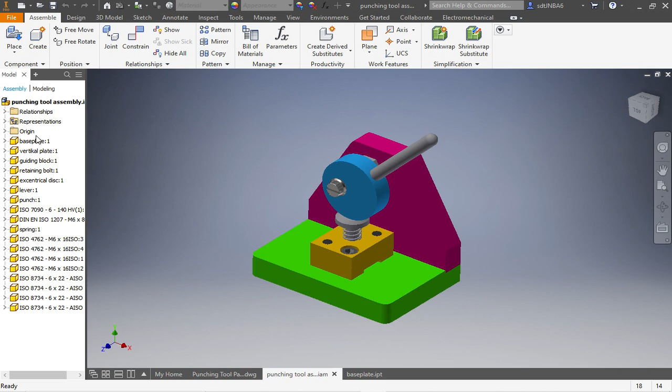Welcome back to our punching tool assembly. Right now I want to talk about the base plate, how the base plate is made. The base plate looks like this. What's important about this part is to use the sketch several times. Afterwards you can do the guiding block by yourself and the vertical plate, but I will discuss both parts as well. So let's get started with the base plate.

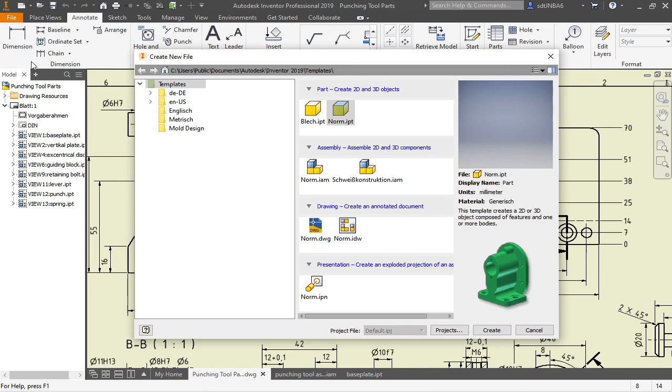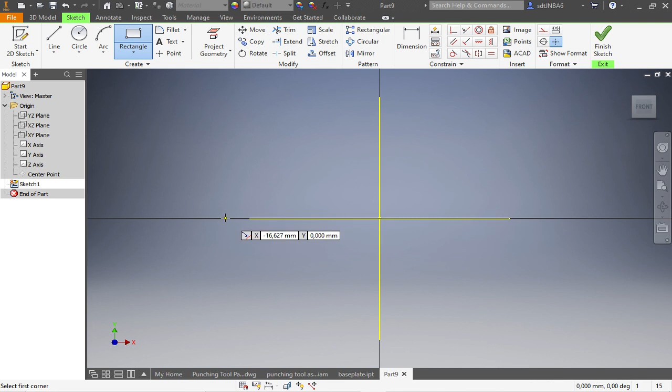We go on File, New, Standard Part, Create, start a sketch. On the XY plane, we project the horizontal and the vertical plane into our sketch to work with it. Make a rectangle, place it on the X line, make sure it snaps to the X-axis.

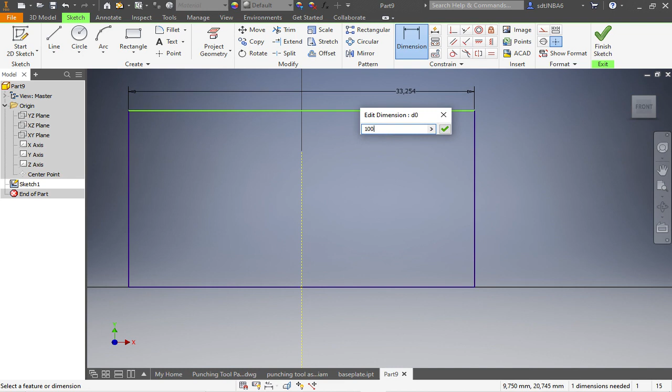I want to make the vertical line as a construction line, so we can go on symmetric and make the left side and the right side, click both, to the center symmetric. We add the dimension, it's 100.

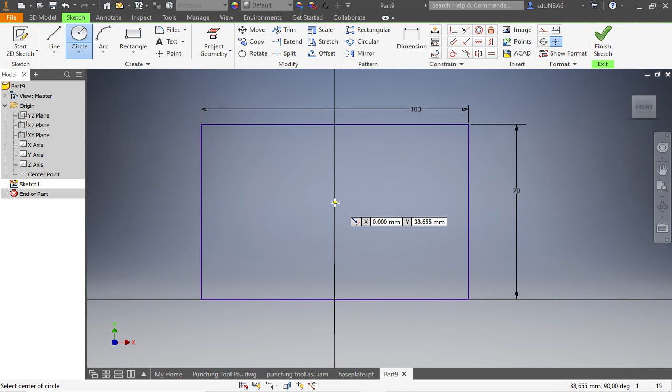Okay, and at first I want to talk about the most important thing. It's the hole in the center with an 8mm diameter where the punch goes through. This is the most important thing. I could make a point and later take the hole feature, but in this case I just take a circle with the right dimension. That's good enough. This hole has a distance of 38mm from the edge.

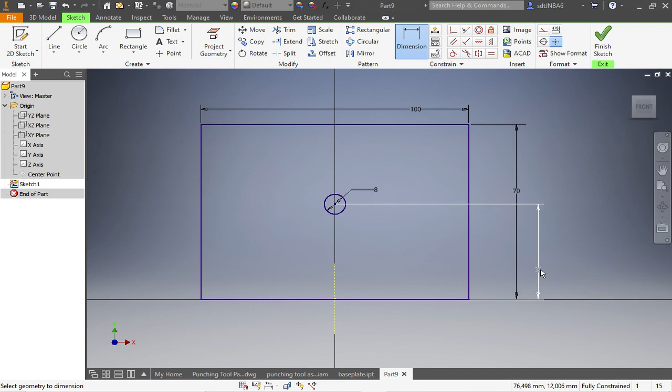And now all the holes that are around this hole, they are symmetric to this hole as well. So let's make 4 points that we later use. So we make them symmetric to the vertical line. Go on symmetric, point, point, point, point, and here. They are also vertical, so go on vertical, point, point, and now the points are all vertical,

but they're not symmetrical to this 8mm hole so far. Therefore, I draw another line, switch this line to construction, and now I can use the symmetry tool again. Point, point, this time this line as a center line. Now you can see all the points are moving symmetrically around the 8mm punching hole.

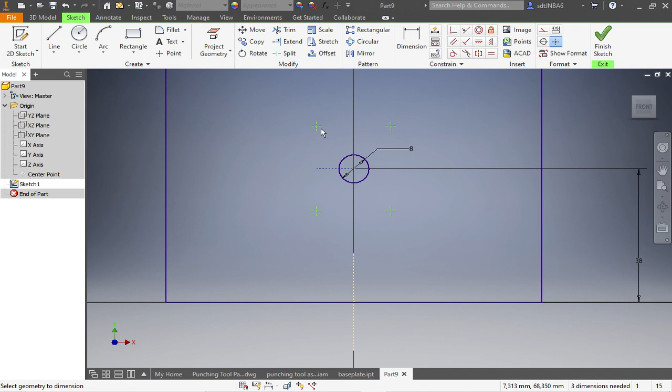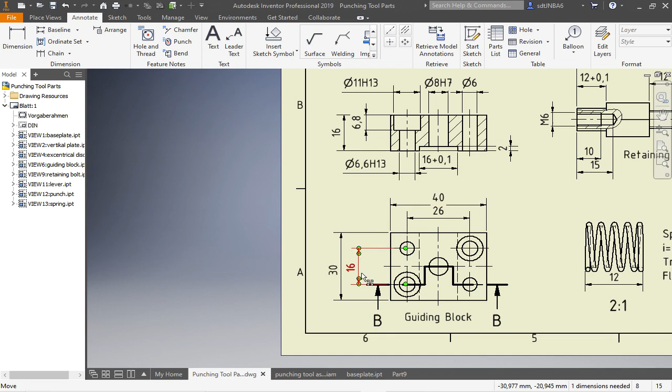So we bring in the distances. It's 16mm here, and this distance is a 26. Why don't I use the 25 and the 51? Because the part that is going to fit to those holes is the guiding block, and the distance of the holes is 26 here. So I rather use the 26 and the 16 instead of those numbers here.

So now we're going to create the points on the edge. Therefore, I personally like to have a line which I switch to a construction line. Then I can place the points, 4 points on this line, 1, 2, 3, 4, make them all symmetric to the vertical line, like so, this, give this one the dimension from the edge, it's 7mm,

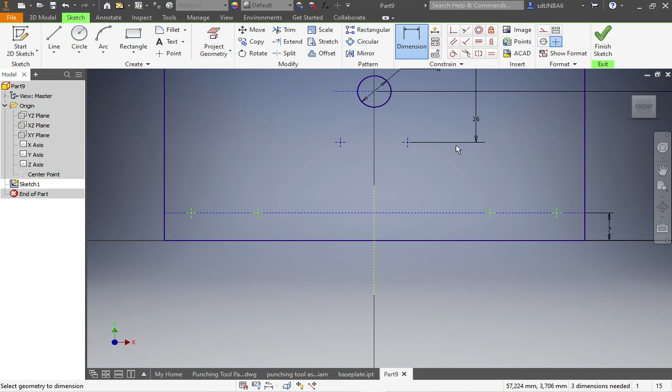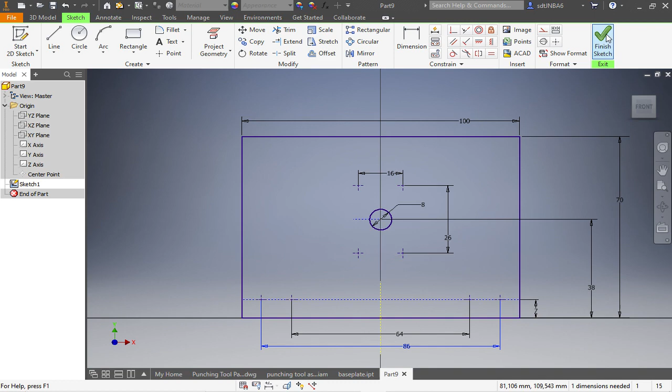insert the dimensions of the holes from each other, 64 and 86. And now we're done with the basic sketch. Finish the sketch. Now we have to extrude. Go on extrude, go on the surface, and I take the positive Z direction, entering a 14,

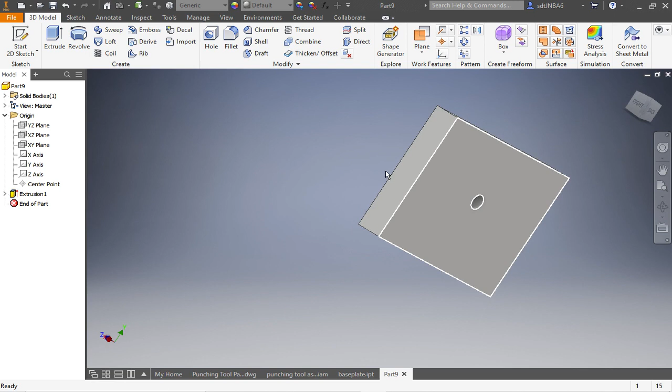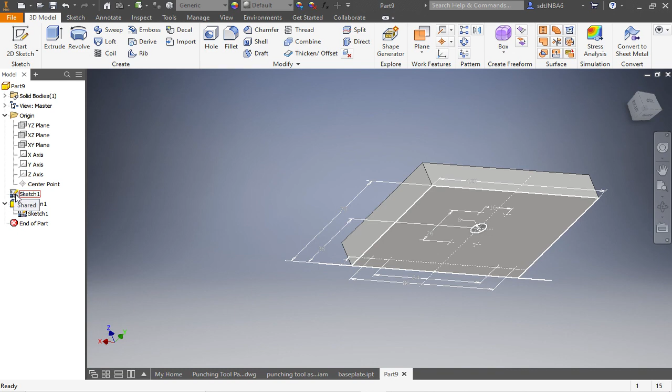and that's okay. And I consider this side here as the bottom and this as the top, as the sketch lies on this side. So to drill in the holes, I have to reuse the sketch I created. Therefore, open up the extrusion, go on the sketch, right click, and share sketch. Now you can see this little hand below the sketch, and the sketch is also shown here at the top of the extrusion. Now I can use the holes again.

So right now I want to make the holes. Go on holes. Normally if you start a sketch, the program chooses all the points you made in the sketch, but actually we don't want all the holes, we only want a few. So we're going to unselect the holes by drawing a box over all the points. And now we choose the points we need for the 6mm hole separately, like so.

Go here, simple hole, no seat, termination, through all. So it's important to flip the directions, like if you only see one or no hole, flip the direction, go in here for 6mm, and then we're done.

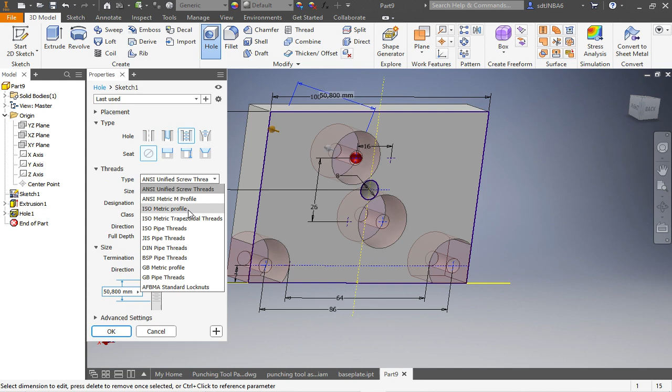Now we are going to make the threads. Go on hole. We uncheck the dots. Now those two will be a thread. We go here on tapped hole. Go on ISO metric profile. Choose M6. Termination through all. And now we have to make sure that we go full depth. And then we go here and here. That's it. Those are the two we need. And say OK.

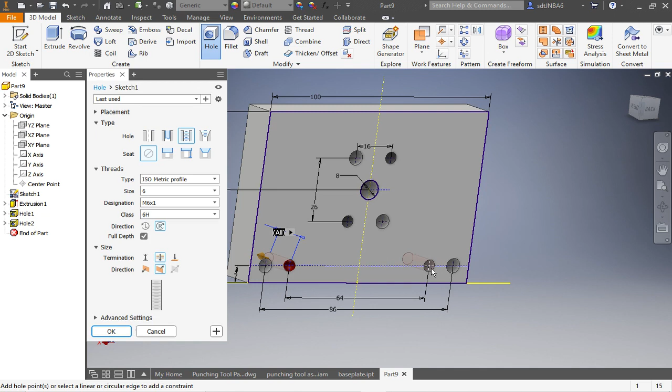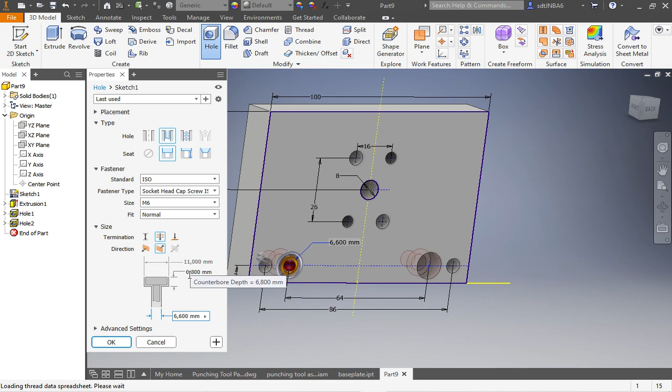Finally, we make those two holes. Go here. The last ones are already chosen. So go here on clearance hole, take the counter bore, go on ISO. We choose the right screw we will put in. So this time it's the 4762. Choose M6. And now we have the right dimensions for our counter bore. Say OK, and that's it.

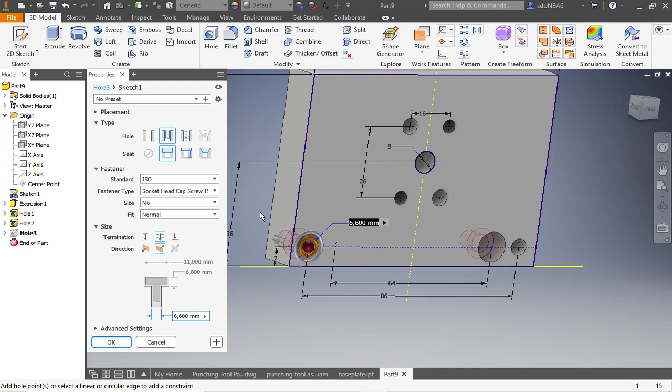So in case you have problems with the holes, I will show you an extra tip. Let's go back to edit the feature. Now if you want to unselect, I showed you before, you can make this box, or you can click the point separately, unchecking it by holding the shift and not pointing at the middle, but a little bit beside the cross. And then you can uncheck as well.

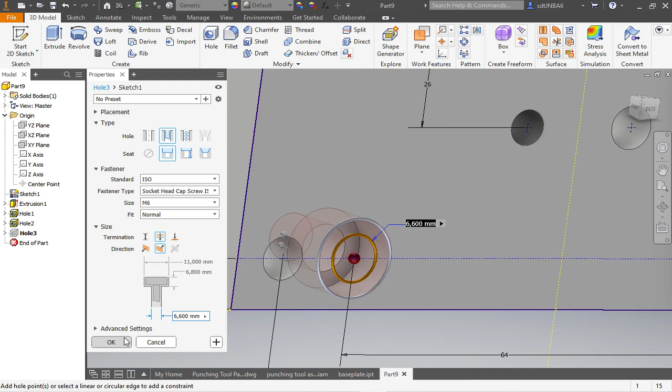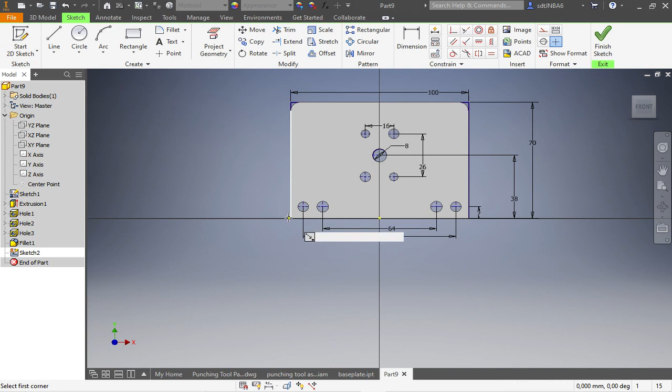We have to insert the fillet on the edges with a 5 radius, this and this one. And now we have to do the little cut on the upper surface. Go here, start sketch, make rectangle again. From the edge to the other edge with a width of 14mm. Now everything is purple, that looks great, nothing is green.

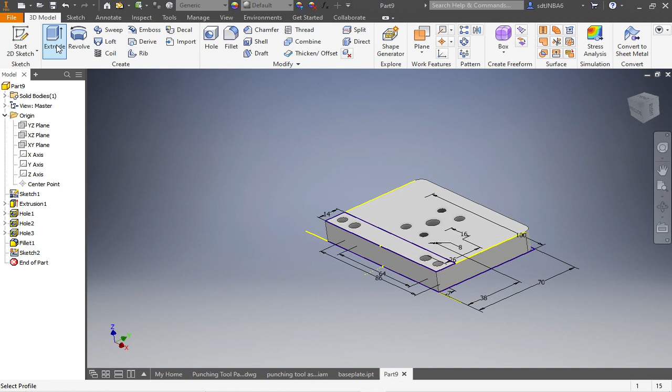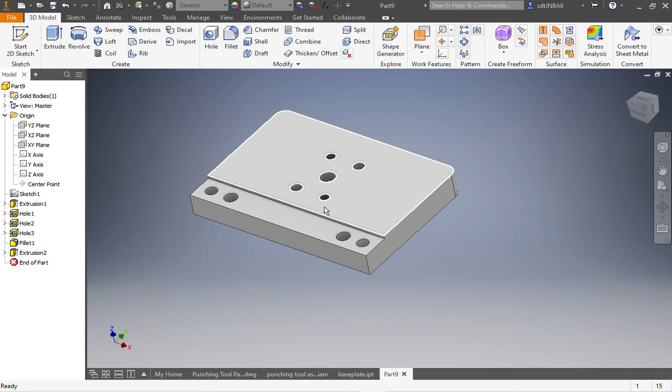We click Finish Sketch, go Extrude, and here on the cut, profile is selected, distance, we have a 2 mm cut. So the only thing we have left to do is uncheck the visibility of the sketch so everything looks fine. Now you can save this part as the base plate, and you can start with the guiding block, making this pattern the same way, and I will shortly show you how I build up the guiding block.

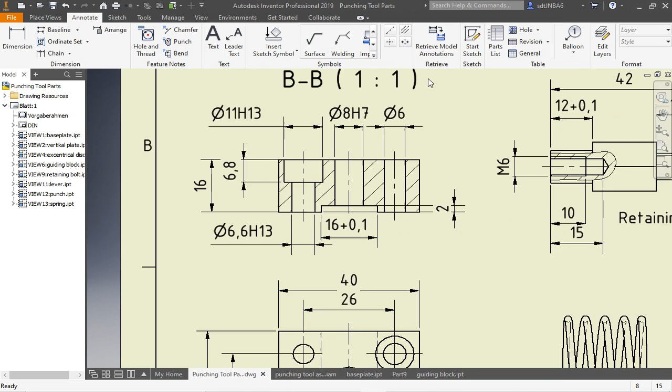Okay guys, let's talk about the guiding block. I just opened the part, but at first I want to have a look at the drawing. So the pattern for the holes is the same that we made on the base plate. And those are the other dimensions. So let's go to the guiding block. That's how it looks, and I will show you the history of the guiding block.

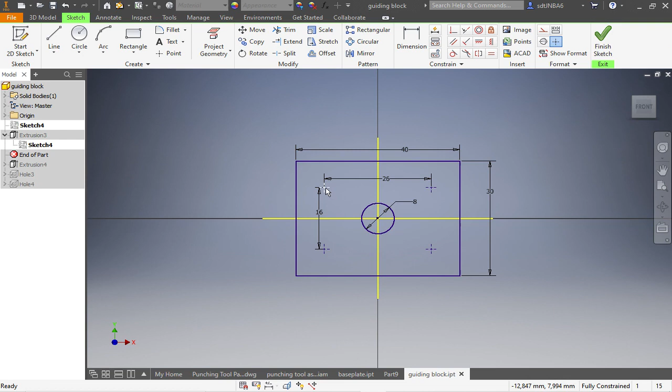So at first I made an extrusion, and in this extrusion I already have the points for the holes I have to drill later. You have to work with the symmetric constraints again. Now go right click on sketch. Don't forget to reuse the sketch to share the sketch.

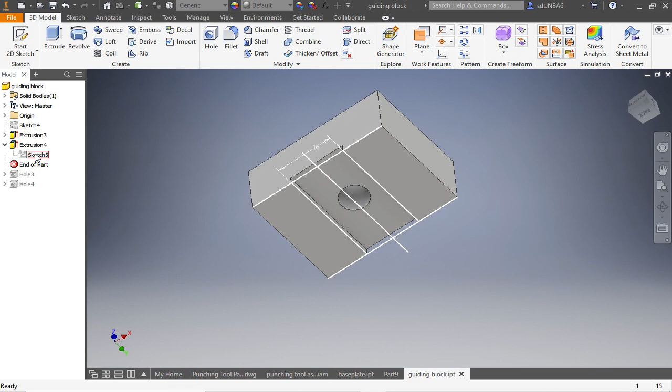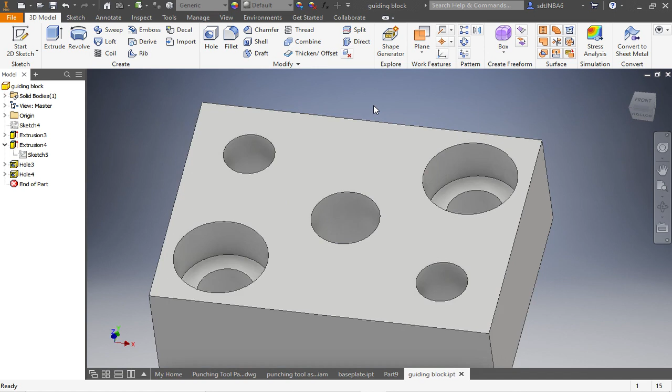Afterwards I put in this extrusion, and you can either make a sketch that looks like this part on the bottom surface of the part, or you can make a sketch like this. Next thing is we use the holes and drill all the holes, and then you're done with the guiding block.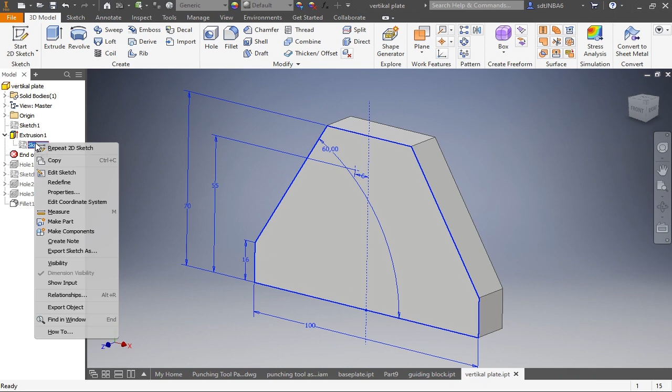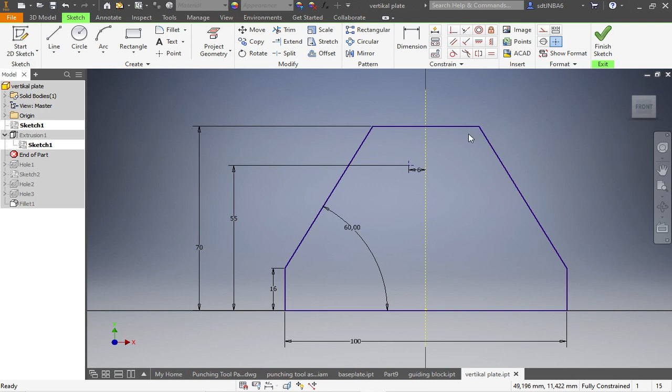Those are the only dimensions you need to have. Please make sure of that. I don't want to see anything else than those 1, 2, 3, 4, 5, 6 dimensions. Please make sure that you made those lines here symmetric again to the center line here. Those can be symmetrical, or if you have problems with the length, you can also use equal length here for those two lines, and then you have the sketch done. I reused the sketch, entering the hole, entering the tapped hole.

Now for the holes in the bottom, I created a sketch that looked like this. Make sure you only use 2 dimensions, and this construction line, if you make it, should snap to the middle of those vertical lines. You can project those vertical lines, go here by projecting and clicking those lines, and you have the length of the line here in your sketch to both sides. Afterwards, you draw a line that is straight in the middle of the part and then place the dots.

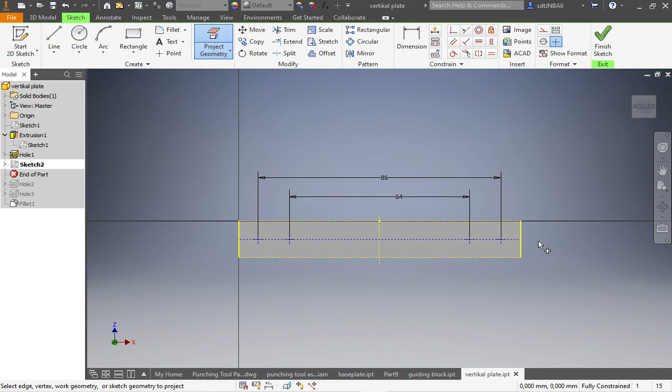You also could extrude this part symmetrically and use the origin planes as a projected geometry, but this is also a way to get the job done. Afterwards, reuse the sketch, drill the holes, enter the fillet, and then you're done with the vertical plate.